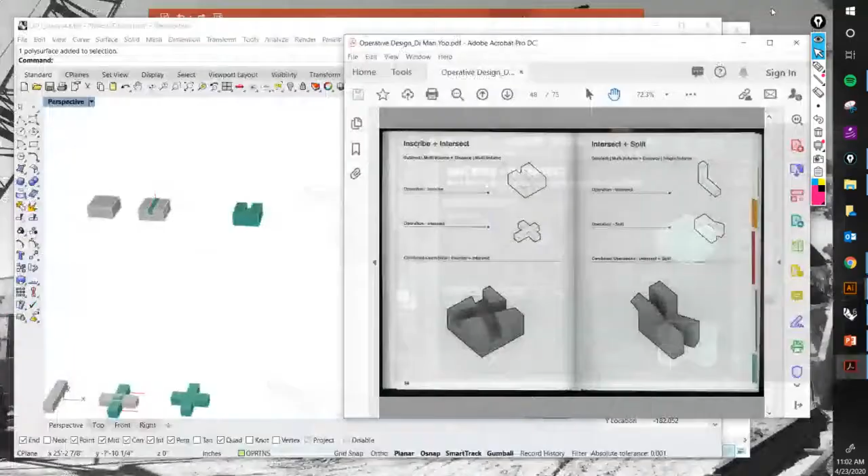Okay, all right guys, so now what do we need to do? Well, we now need to actually create the content for this board. So we're actually starting with, in this case, for example, we're starting with inscribe, and we're going through its operation. So the way that I recommend doing that is to actually open up the book into the operation that you're trying to depict, in this case, inscribe.

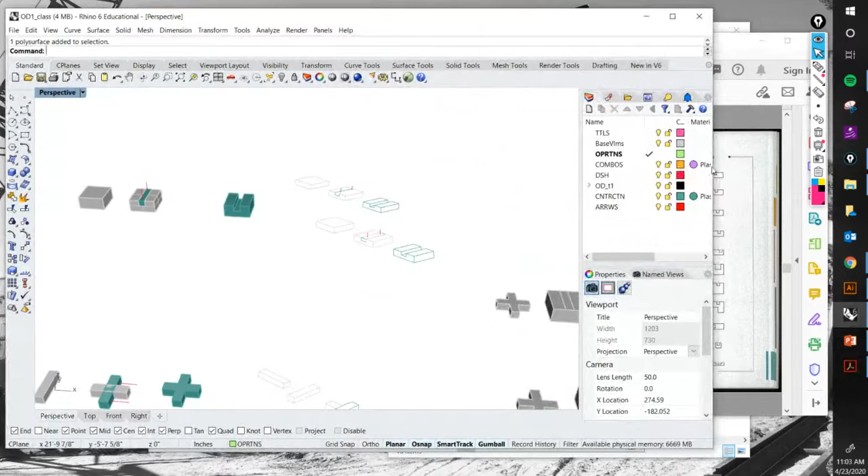Study the kind of drawings that you're gonna need so that you can then draw them. What do I mean exactly? Well, that I come to your Rhino space, where you have your operations that you guys are submitting today.

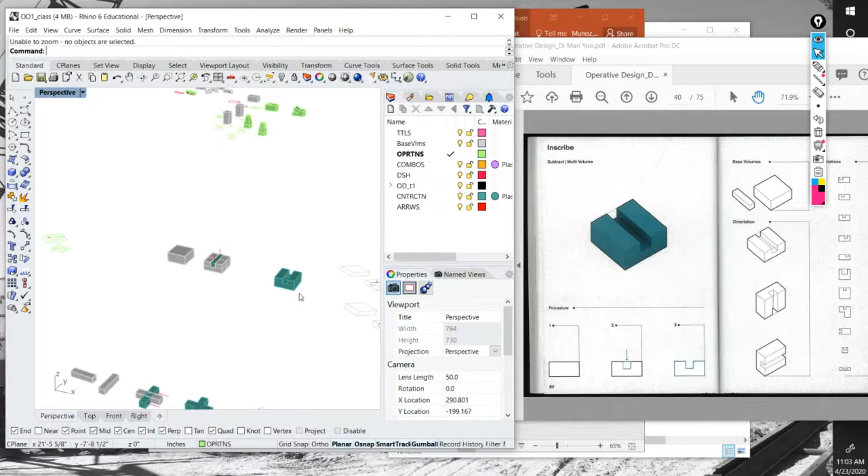I can copy those, and notice, right, I have copied the base volume. Here, I'll start it from scratch. So I can copy the base volume right here. From there, I can copy that.

Notice that I am using color as a cue for this. So I'm gonna set my first step right here. Oops, maybe not like that, right? So I have base volumes on the left, and then here I start labeling this.

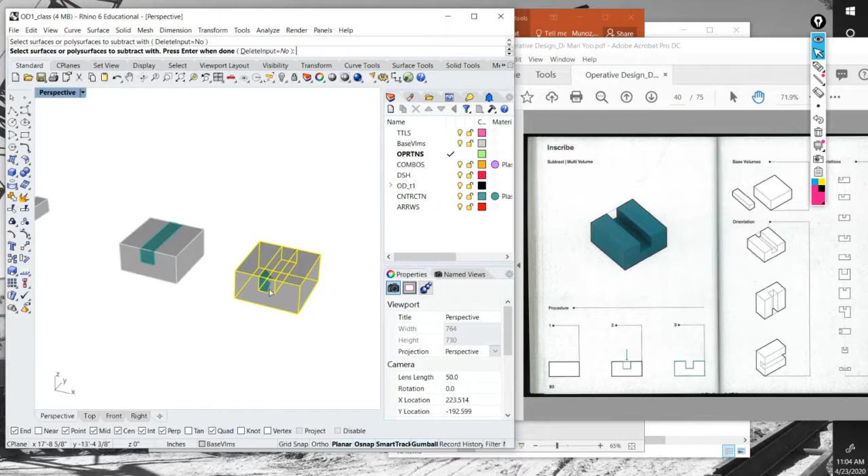So this guy turns into construction layer, start moving this, do that, and then copy it, and do the Boolean difference. So I subtract from that one with that one, and that should be the end result.

And I changed this one to its right layer. So notice I have gone ahead and translated this 2D procedure into a 3D procedure, and I have gone ahead and enhanced it. So step 1 is base volumes, I have it right there. Step 2 is the insertion. Step 3 is the actual inscription, the inscribing part of it.

Now, notice that I'm not done yet. For starters, I know that this is going to give me problems right here, this drawing. So I'm actually going to do a Boolean difference.

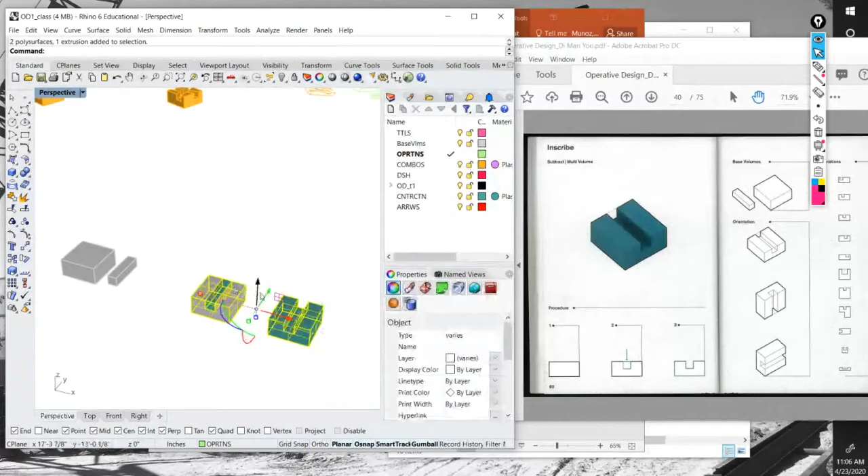But I subtract this guy from this guy, but I'm not going to delete the input, right? I'm actually just going to leave it like that. So I have that right there. Okay, so it could be argued that I am done drawing the process, right? But there's one more thing that's not here, which is the little arrow. And we can draw that on Illustrator.

I like to draw it on Rhino, at least to start it on Rhino, so that I can actually work the position of it. Okay, so notice that I created a new layer called arrows, right? So I can get into that layer. I can type line and do a vertical line. I am just going to draw a vertical line for right now.

Let's say maybe there. And then I can position it. Maybe that right there in the mid. And then move it a little bit. I'm just kind of eyeing this. But since I'm working 3D, I think it would be better if I actually have 2 arrows.

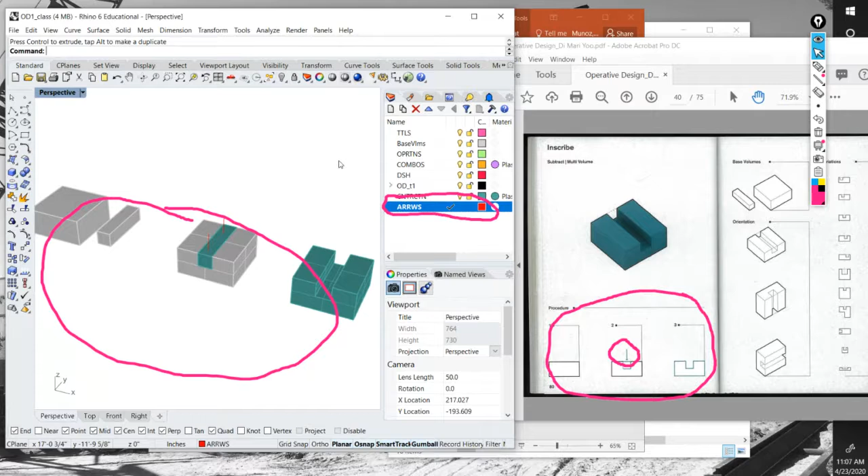I think it complemented these drawings, because again, it's not just a copy exercise, right, guys? It's not just about copying what you see straight from the catalog. There is some creative input into all of this, and some modifications to be made. Okay, so I would recommend that these lines, the dashes and the arrows, you draw them in Rhino, and you edit them in Illustrator, right? And it will make more sense as we continue.

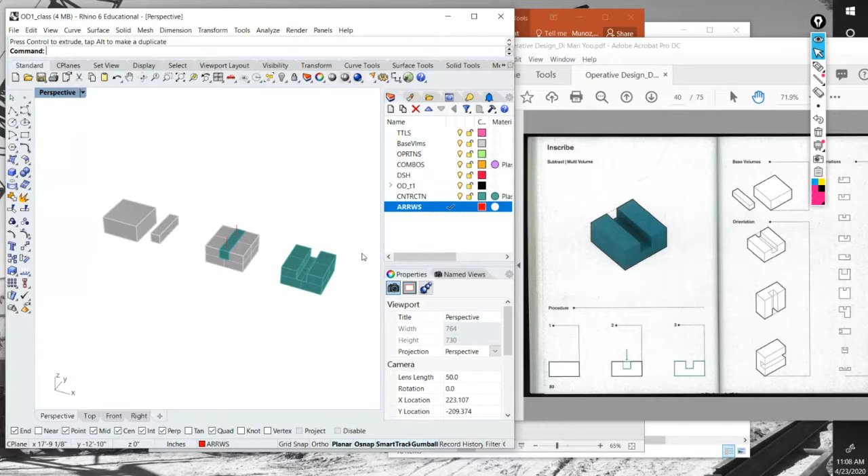Okay, so I have my base volumes right there. So let's set this up just like Samira, right? Because right now it's a Rhino file, and these are all images on our screen. But as Samira mentioned, we need to turn this into lines. And for that, we can use the make 2D command so that we can edit on Illustrator. So let's go ahead and do that.

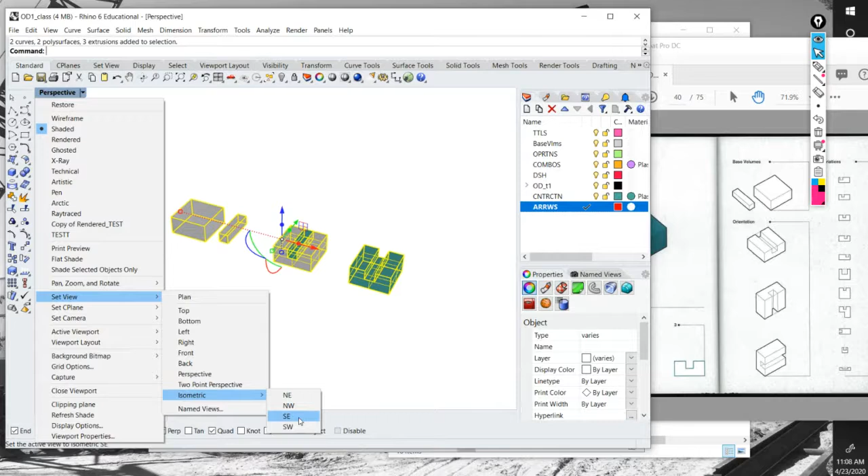So the first thing that we need to do is set up our view. We want to select our objects, go to set view, and set up an isometric view. A big component of these drawings being successful is them being in the isometric view. So I'm going to set up a southeast isometric view. Notice that it's going to zoom out all the way, but that's why I selected the geometry first, and then I go right here and click zoom selected.

Okay, so I have my components, I have my arrows, and I have the right view. The next step would be to do what? Make 2D. Right, make 2D, and select the objects, so enter. In this window right here, we want to do the view. Let's leave the properties to input objects, and tangent no, hidden no, silhouette no. So the only thing that we want is to group the output and hit OK.

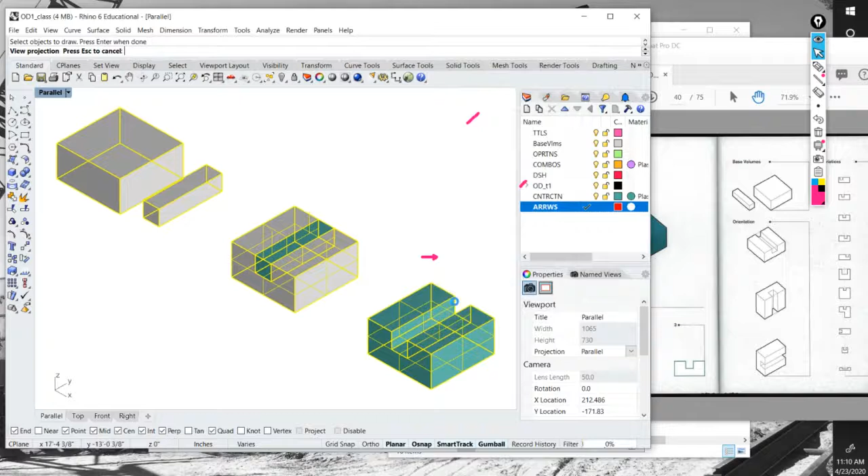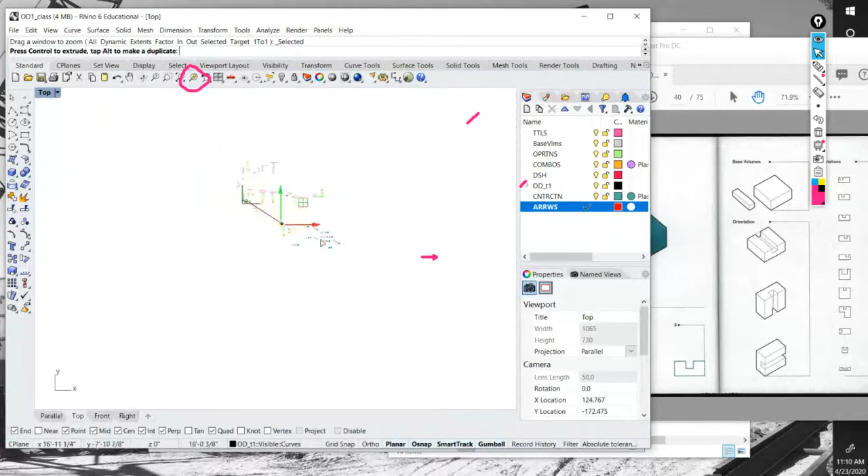So it's computing, it's processing. It's taking a few seconds, in this case 1.8 seconds. Now remember that the next thing that we need to do, guys, is go into your top view. Click again on zoom selected, because right now it should be selected since it was just created. It would bring you right onto this screen, and I'm going to drag it out of there and place it right next to wherever I'm working, which is over here. So here it is. We have the 3D versions of them, and we have the 2D versions of them as well.

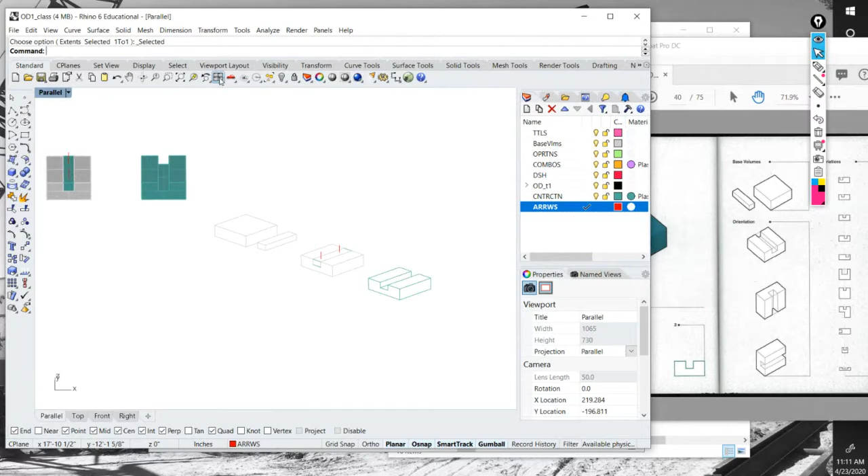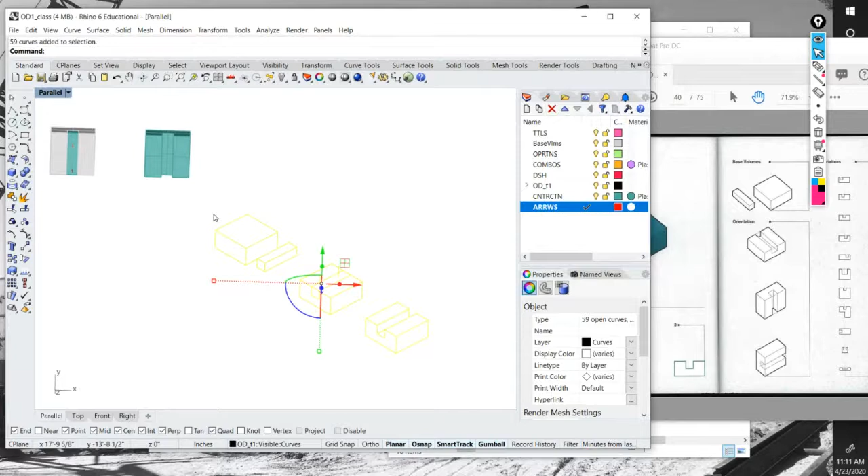Okay, so let's maybe start there, so that we can actually start using some of these drawings to generate our board. So the next step would be to export. We're exporting our 2D drawing, the one from make 2D. So we select export, then location, file name, and file format, which is really important for us. So I'm going to select the project folder.

Let's make sure that we give it a name, so this is inscribed make 2D. Oh, I don't need to be yelling. Inscribed make 2D.

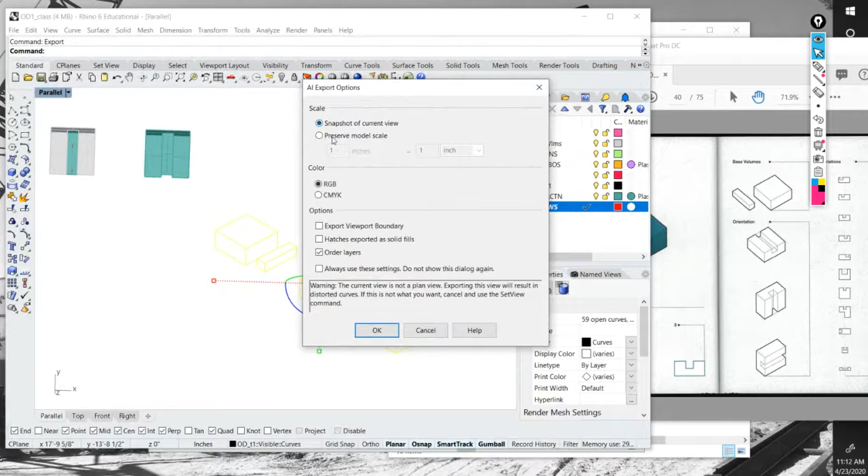The format is important, guys. The important part is that it is an AI file, an Illustrator file. So let me clear my screen right here. So again, location defined, file name, and format being an Adobe Illustrator file. I go ahead and click save. This window, I can just leave OK. And that's it.

Next, we can come to our empty Illustrator file, and we can go onto the folder. And here is the file that we just created, inscribed make 2D. So I'm going to go ahead and double click on that. I'm going to group them before I move them. So select them, Control G, select them, Control G, select these and Control G.

I can then select them, Control C, Control V over here, where they go. Okay. I should create a new layer over here. Or even better, rename this layer as Make 2D. So titles is in its own layer, 2D on its own layer, and layer 2, well, I guess we don't need it right now. Right. So, okay, so we're making progress.

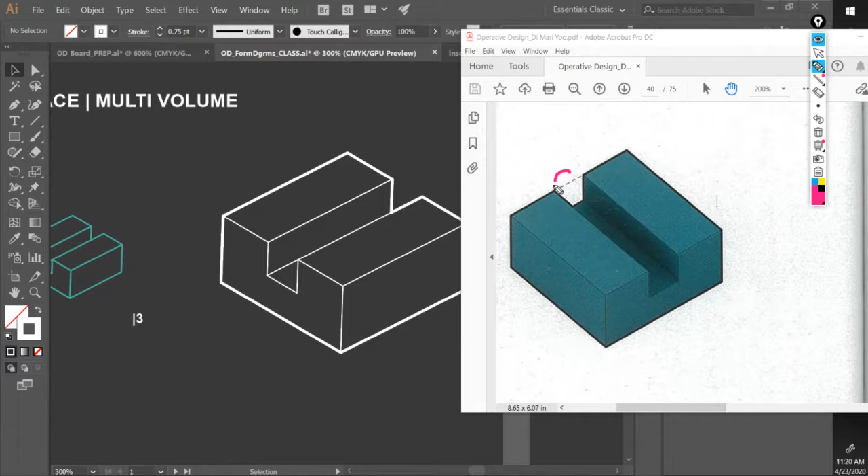Notice that according to this drawing right here, I am missing this dashed line right here that is actually showing the traces of the operation. No worries, I can draw a line from there to there. The same thickness, except that these ones are going to be what? Dashed, correct. So we have that right there. Okay.

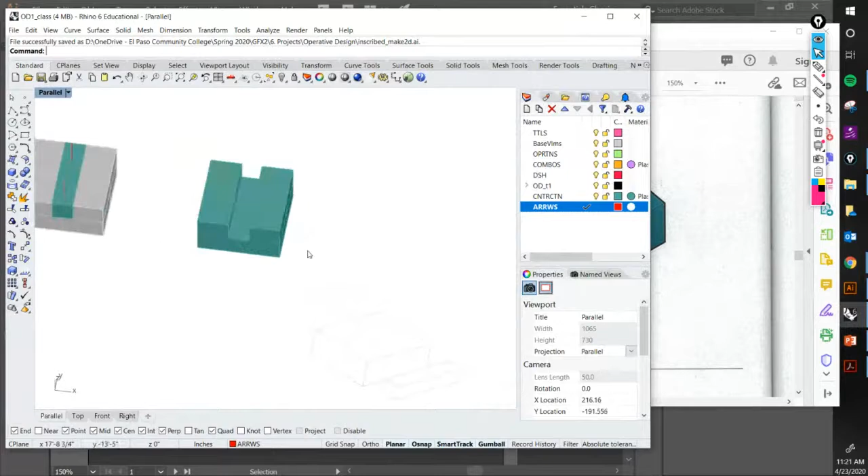Lastly, we see that we have some color at the end of the diagram. So how can we do that? Well, we can go back to our Rhino drawing. Notice that I'm going to get into a rendered view.

Now, your guys' render view should be like this, right? By default, it has no materials, but notice that I have gone ahead and matched the color of the lines, or the layer color. I've matched the material color so that I can assign it that color on its render view. I set the view again. It's very important that they match.

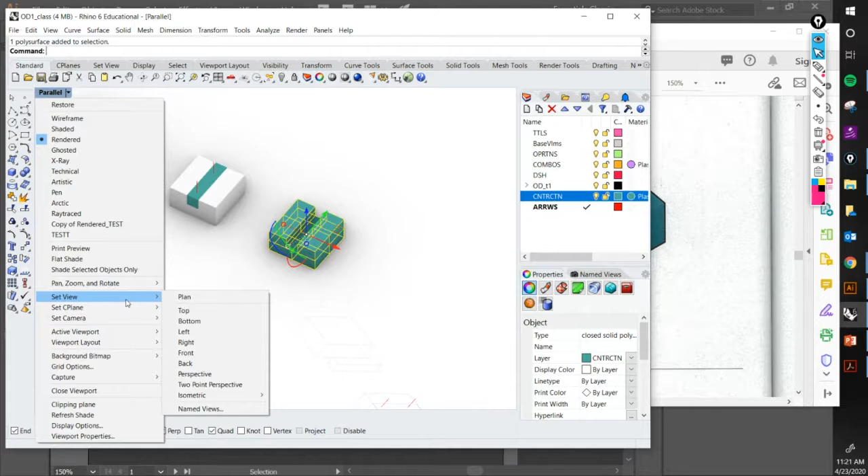So set view southeast, zoom selected. I'm going to zoom out a little bit. I'm actually going to move it aside from the rest of the components. So I'm going to make some room over here, select this, zoom into it again, right? And create this view right here.

Now I'm going to show you guys a trick. Some of you might know it already, some may not. This might come in handy at some point. We're all familiar with the snipping tool. If you want a dynamic background that you can actually blur, don't do a clipping plane. Do a view capture, and don't do a clipboard either. Do a file.

Within this window you have the settings, and then choose transparent background. The resolution we can leave as is, so I can do OK. Now, it's very important, if you want to maintain that transparent background, that under type you change the file type to TIFF. I think PNG might work too, but I know TIFF worked because I was playing with it yesterday.

So TIFF, now we can call this Inscribe render. We come over here and go edit, paste, whoops, sorry, file, place. Either file, place, and then we go to the folder, projects. Inscribe render, we place it, and I click.

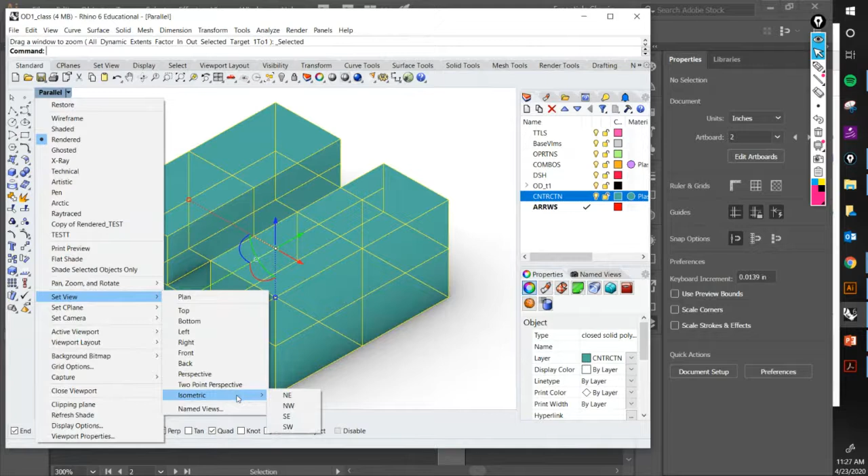So I make sure that I set my view again: set view, isometric southeast, zoom selected. I really don't need all of them, I just need this one, so I'm just going to Make2D this. You shouldn't have to do this again. It was just me; for some reason I messed up when I was generating this one.

I think I am somewhere over here. And actually we should be able to see how they're a little bit different. Should.

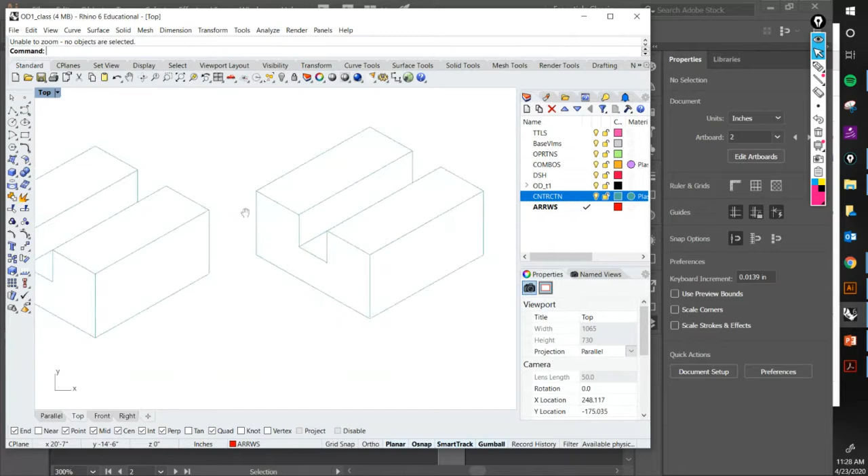All right, let's give this another go. Export. AI. I don't want to override the other one, so inscribe make 2D. I'm going to call this make 2D 2. Okay. Open it. Copy it. Group it. Make it smaller.

Format it. Right. So again, real quick, I can go around and select the outline. Press what? Control J. Join. And I match that outline. Select these lines right here. Match this outline right here. And I'm missing my dash lines right here, from there to there, and from there to there. Select them, shift, match.

There we go. Get rid of that. Bring this guy in here. And we have that right there. And we have created our first component of the board. Okay. Notice as well that the background can change. Let's say that I wanna select something different. Can create something. Well, that's kind of hard to read.

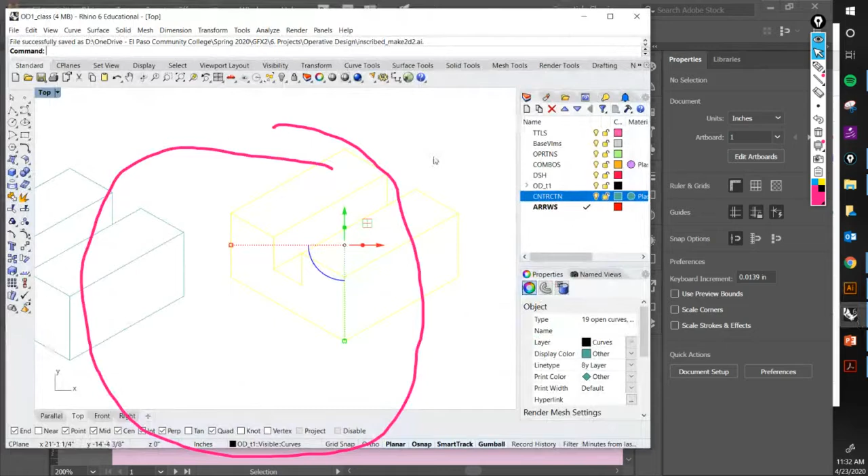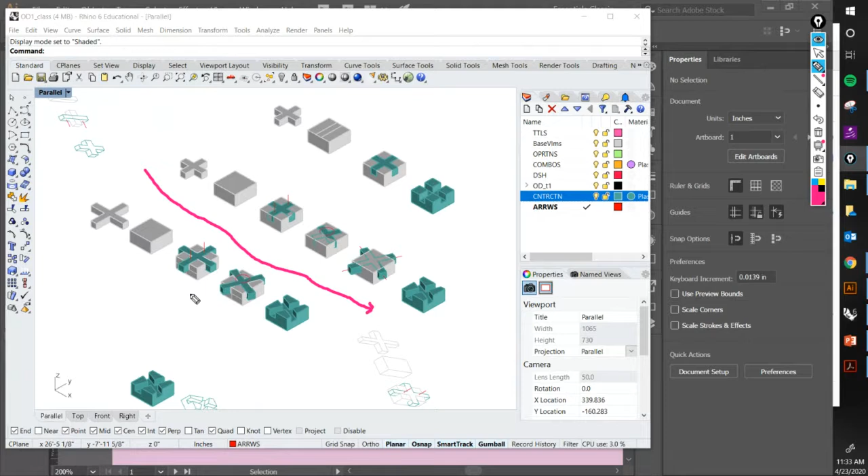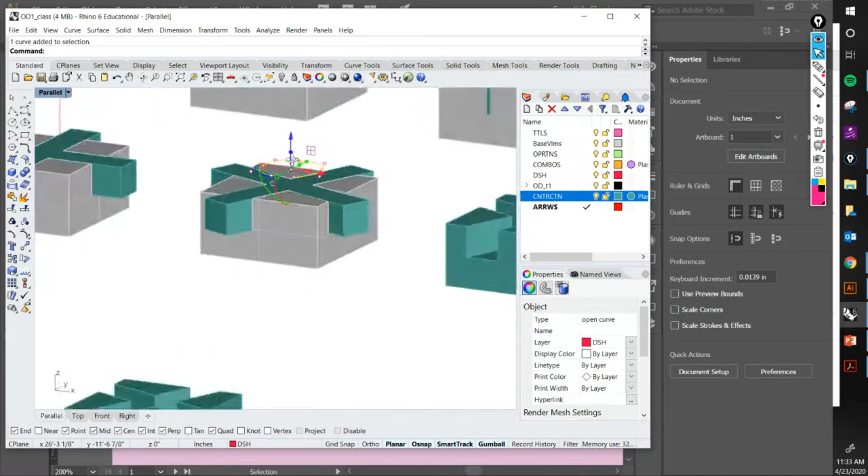And notice here, I think I brought this up last class, there's sort of a process that the catalog skips. So if you look at my screen right here, this is the method that I was following to do the inscription intersect inscription combo. But I noticed that the book doesn't really talk about this rotation. It does the insertion into this base volume, but it doesn't talk about that it is rotated. So I drew this semicircle on top of the form, so that I could depict right here that the form has been rotated.

Okay. How do you guys feel about that? Everyone still there? I feel like I'm just talking to the air, but you know.

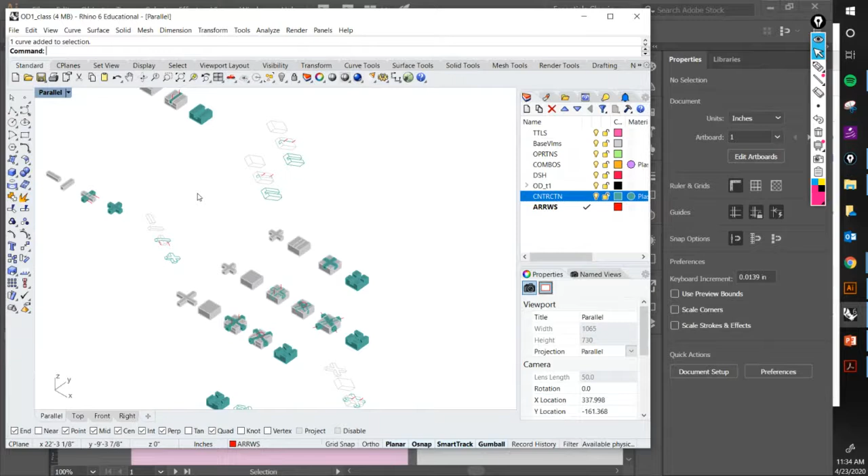You make it seem so easy. Well, I had to prepare for the class, so I did this already yesterday. But don't get me wrong, I spent a lot of time yesterday figuring how to put it in a concise way to share it with you guys. If you see my modeling area right here, I tried it multiple ways. I know how to do it, but I'm trying to show you the fastest way of doing it, and not give you too much blah blah blah. But it's just practice, Idali, just like anything. You'll get better at it. That's why we're doing this, so that we can practice.

Okay. All right. Let's do this, guys. It should be fun. Let's try it. Pick 3 of your 6 variations and try it yourself. And let's have it due before the end of next class, to give you some time to work on it and to allow some time for me to answer questions on Tuesday. Let's get ready on Tuesday to present at least.

So for Tuesday before class, guys, I want to see at least 1 sheet. Just one. If you have more, better. But I want to see at least 1 sheet of this kind of operation right here, with its 3 categories or sections.

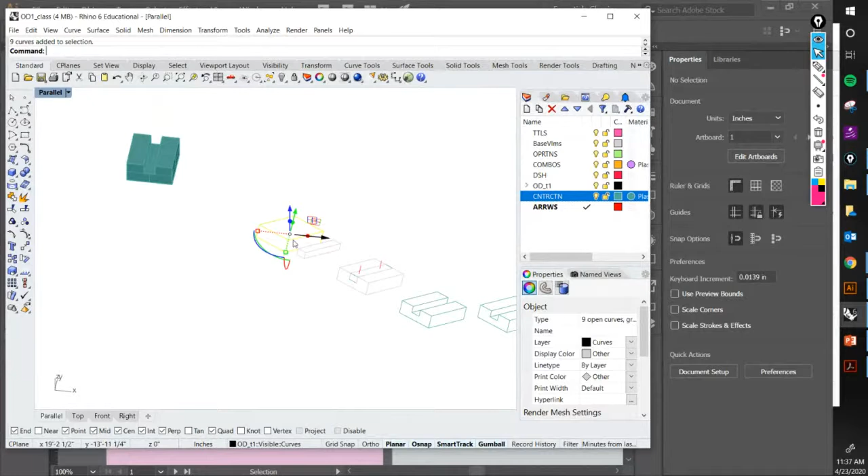What is better, make 2D or export? For this exercise, Idali, make 2D is better. Well, it's not that it's better, but it's what works best. So make 2D first and then export as an AI file, right? Yes, make 2D first and then export as an AI file.

Okay. All right guys, well, let's again just try at least one. I am going to create an upload so that you can upload it before next class. At least one, I just want to see how the process is looking. We'll call this like a little schematic sheet, or a progress sheet. I just want to see one, and I just want to see the graphic methods.

Yes, so I'll do that, Dante. I'll upload a copy of this board right here as a reference. Yes. No problem, you're welcome.

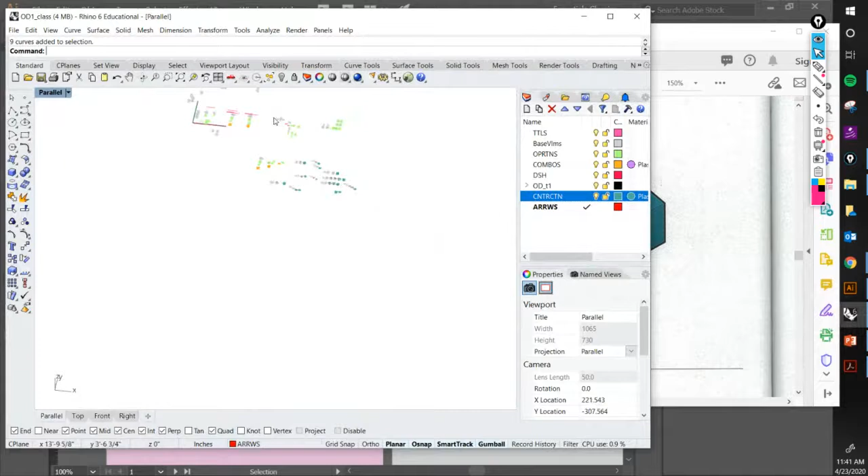Yes, so tonight we talked about that, right? Tonight is the 6 combinations, just like this, Pablo.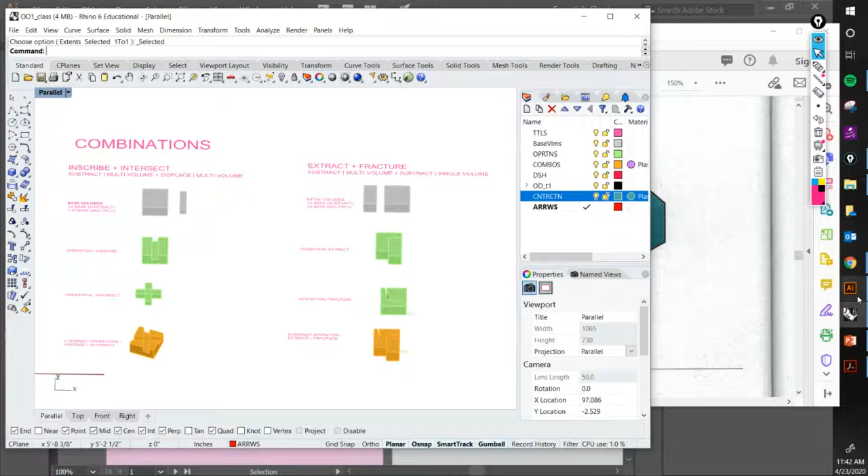So one more time: the one board is due before next class, and the final 3 are due at the end of the day next class. Does that make sense? So I want to see one board before class begins next class, just to see how things are going and clarify a few things. But I want to see them before class, so probably it'll be the night before, so that I can see them in PDF.

And then the idea is that you have part of the class next class and part of the rest of the day next class to finish and upload the 3 on Blackboard. So 1 before class, and the final 3 by the end of class or the day.

No problem, Karina, you are welcome. Okay, give it a shot.

Where things get a little bit more exciting and more interesting is when you start working actually on the operation of the combination. This one right here, and I noticed that 3 steps was not enough for me, so I actually had to do 4 steps. Some of you guys might have to do 5 steps. I don't know, it just depends on the operations and the sequence that is required in order to achieve the end result. But notice that for that one, there's no outline for that. You have to create that outline yourself. Okay.